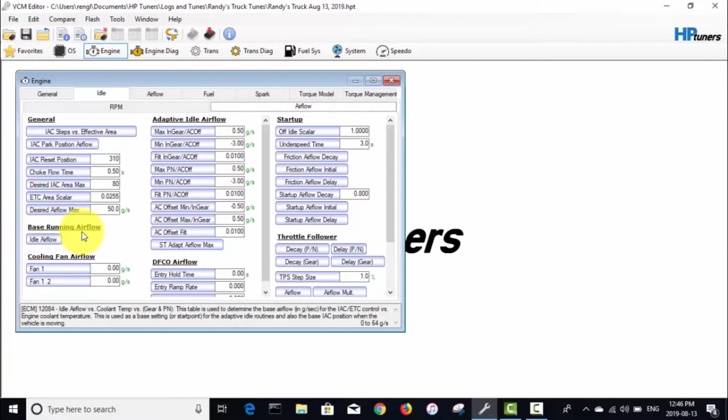Okay, so like I said, I'm in HP Tuners here. We'll go have a look at that idle airflow table. To get there, you go under engine, and under the idle tab, you've got to make sure you're on the airflow tab, and then it's right down here - this base running airflow, idle airflow. So we'll click on that, let me just drag this over here.

My theory is, even though if I look down over here, this desired airflow max in my stock tune was set at 40, and because these numbers in here are above 40, I bumped that up to 50. But I think there's something internal to the operating system, or something in the background somewhere that I don't know about, that doesn't like when these values are higher than 40.

So I think because my engine coolant temperature was starting out somewhere in this range, until that engine coolant value got high enough that this base running airflow was below 40, it would cause all kinds of problems. So basically I'm going to go into this table, select these 3 cells...

And I'm just going to set them to, I don't know, let's try 39.9. Now I'm not in my truck right now, but I'll hook up to the truck. First let me save this.

Okay, so we're in the truck. I've got that change flashed to the truck. I'm ready to start scanning here, and then we'll start it up and shift it into gear and see if it dies. Starting the scan, starting the truck. Starts fine, so we'll put it into gear, and it still dies.

So much for that theory. I think now what I'll do is plug in the numbers that Kyle from Goat Rope Garage sent me, and maybe that base running airflow table was still too close to 40, so I'll try lowering those numbers even more, using the numbers Kyle suggested.

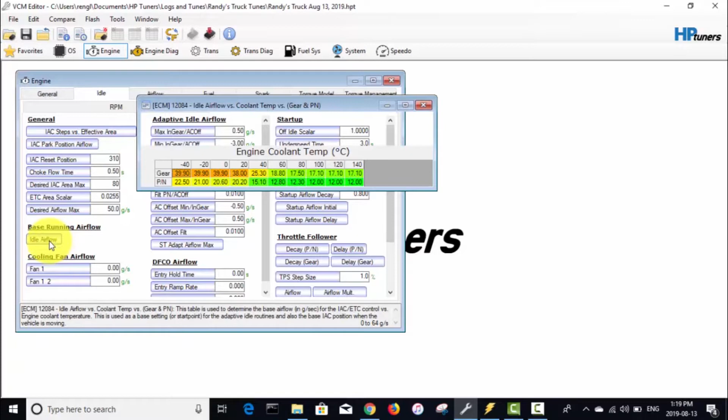Okay, so we're going back into the tune here to that idle airflow table, and I'm going to plug in the numbers that Kyle with Goat Rope Garage emailed to me. So he's saying in this cell go...

29.24, here we'll go 27.3, this one will be 26.77, 26.26, and 19.62, and then the rest of these will stay the same. So I'll save that and we'll flash it to the truck and try it again.

Okay, so we're back in the truck again. I'm going to start scanning. I've flashed that tune to the truck with the numbers that Kyle sent me, so I'll try it again here. And I'll try to shift it into gear.

And it works. Shift it back to neutral. Shift it into gear. It kind of bobbed down a little there, but at least it's staying running. So yeah, that seemed to work.

So thanks, Kyle with Goat Rope Garage. That's well worth the $15 to support his Patreon and get his input on this. It seems to have solved my issue, but...

I'm just looking back at my log here. I think I'm still going to adjust things, because if you look right here, my idle air counts are basically pinned at 310, which is the maximum. That's why the computer is calling for it to run at 925, but it's only able to run at 818 because the IAC stepper motor is maxed out.

Okay, so I took the truck for a drive, got it up to normal operating temperature here, 90, 91 degrees Celsius, and our IAC counts are in that 150, 155 range. Ideally we'd like that down around the 60-ish mark.

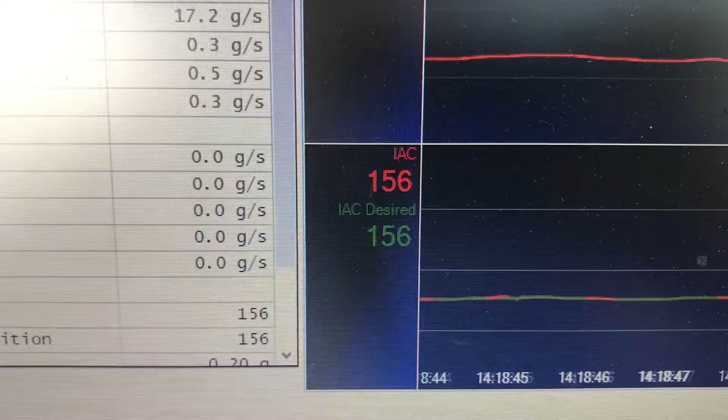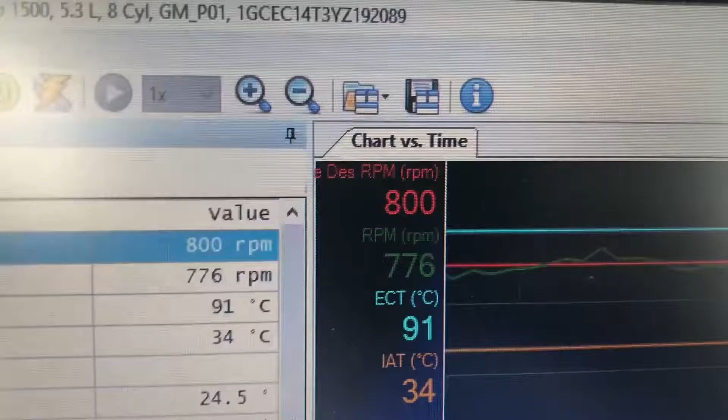But the first thing I'm going to do, right now it's calling for it to idle at 800 RPM. If I lower that, in theory, the IAC stepper motor should be calling for fewer steps. So that's the first thing I'm going to do before I calibrate the IAC steps, is try to lower my idle RPM and see how much that lowers my IAC steps. We'll do that now.

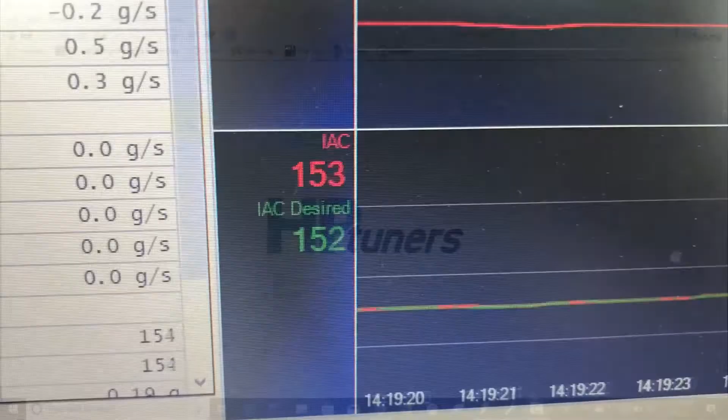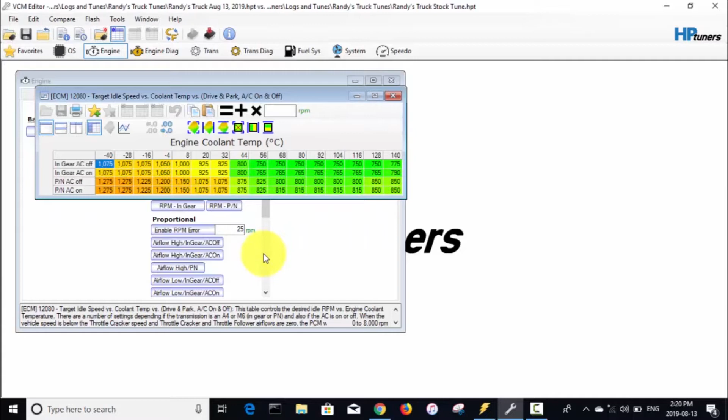Okay, so like I said, I'm going into the tune, and I think after I put the cam in, I bumped up the desired idle RPM by quite a bit. So I'm going back to this table right here. Now let me open up my stock tune, and we'll just compare. So this is my current tune, this is my stock tune.

So it looks like, actually I think we can see the difference here. So basically I raised that whole table by 225 RPM.

I'm going to go back and take, so right now at its slowest idle, it's idling at 750. Just for the heck of it, I'm going to take 150 off this whole table and see if it'll idle at like 600 RPM at the slowest. So we'll go to this whole table, go minus 150, and then hit this plus sign. So yeah, that's dropped everything.

So yeah, now at the temperature we're at, it should be calling for 600 RPM in gear, and I don't have AC anymore so that's not a factor, and it should be calling for 650 in park. So I'll save this and flash it to the truck, and then we'll see how that has affected our IAC.

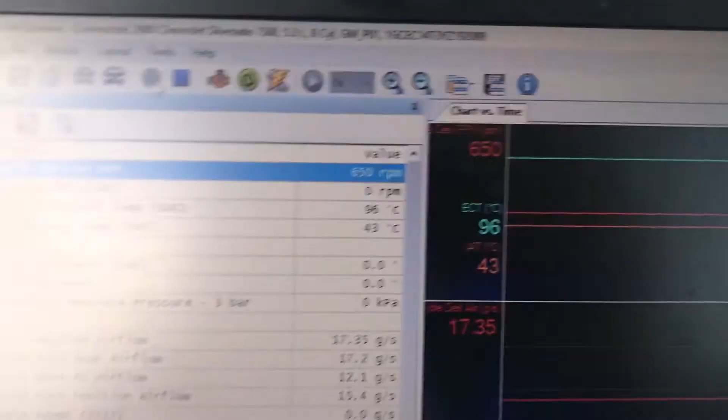Alright, so I got that new tune flashed to the truck where I've dropped the RPM from 750 to 600 at its slowest speed, and I'm scanning, so we'll fire up the truck and see how it idles and what our IAC steps are at. So you can see it's calling for 650 there.

Our IAC steps are lower. They're in that 140, 135-ish range.

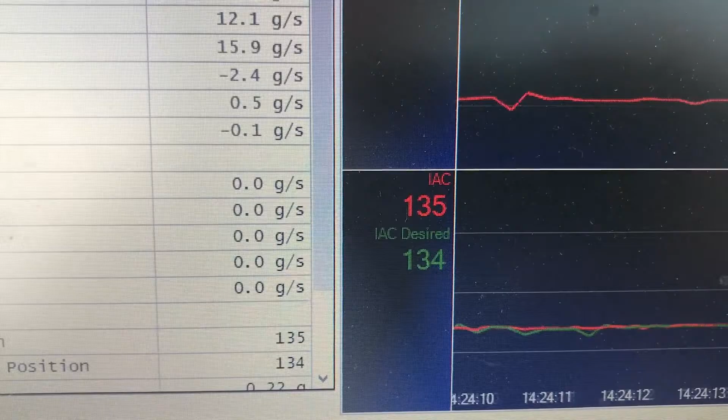But now let's shift it into gear and see how that goes. So it's calling for 600.

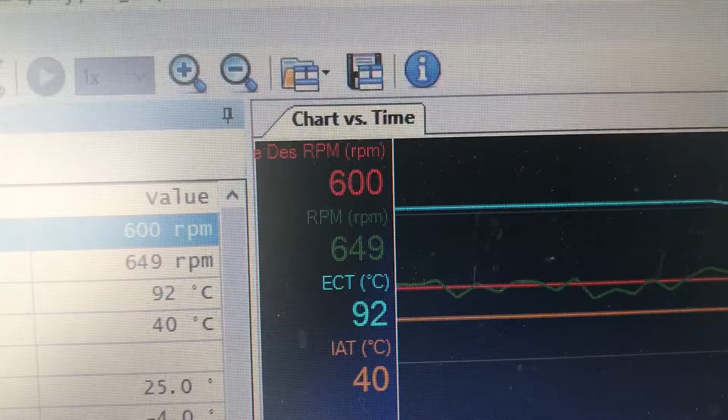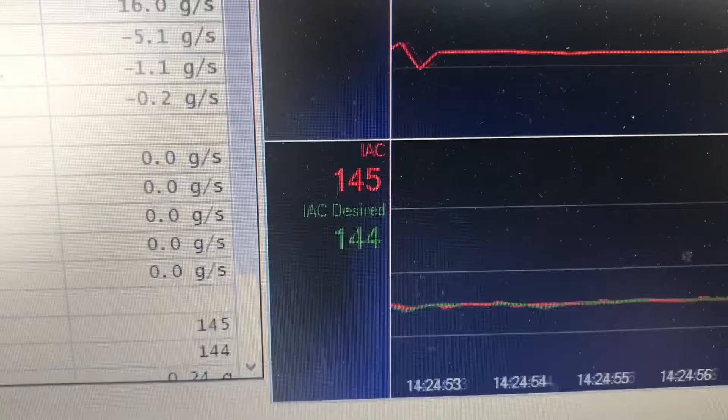IAC steps are still in that range, and that sounds too slow, like it's barely running at that. So I think I'm gonna add some of that idle back in, but it didn't make enough of a change on those IAC steps, so I'll shift her back to park here.

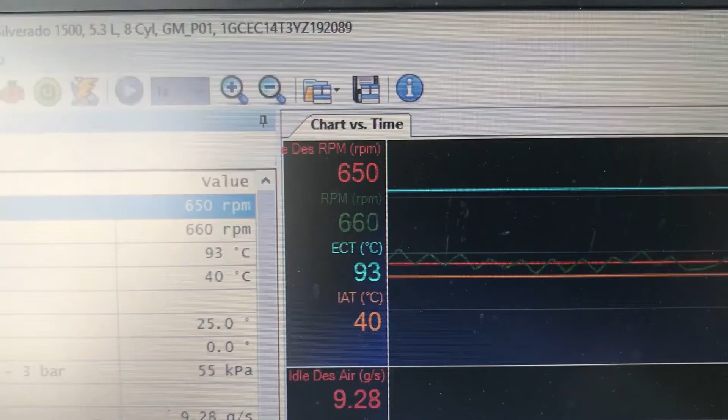I don't know, I'm thinking I'll add about 50 RPM to that table. Add 50 RPM back in and see what happens there.

Okay, so I added 50 RPM back in. So now it's calling for 700 in park, and it should be calling for 650. So I'll fire that up and see what happens.

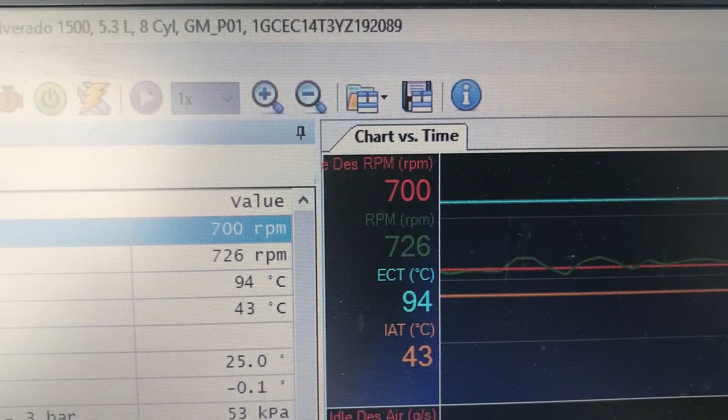Yeah, IAC steps are still in that 150 range. Idle doesn't sound too bad. I'll just try it in gear here.

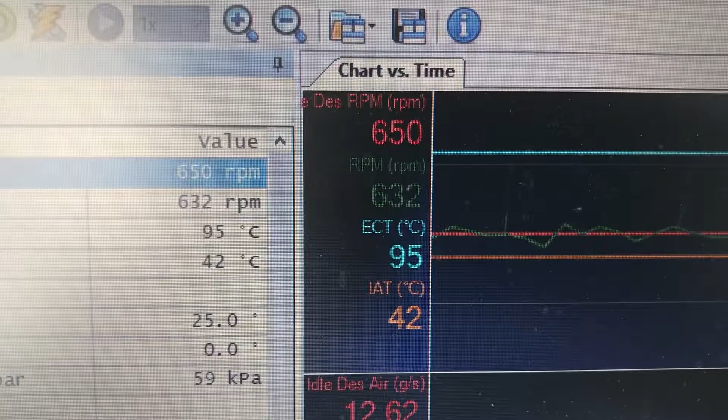So you can see the desired RPM dropped to 650. You can see a jump up there where it called for more air on the IAC. And it's not sounding too bad. You can definitely tell it's got a cam.

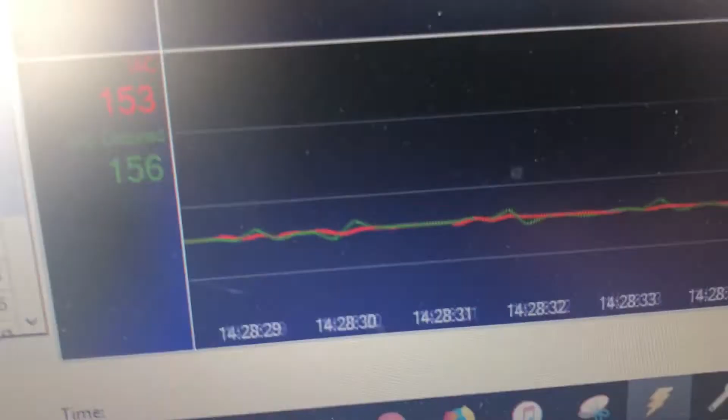But anyways, I'm gonna just park on the side of the road here. So I'm gonna go back to the garage and then we'll work through this IAC adjustment procedure and try and get those down into the 60 range.

So I ended up coming back to the house and we had company over and stuff, so I ended up not doing that IAC adjustment yesterday, which was when the first half of this video was made. So now the truck's been sitting overnight again, and I got to thinking after I did that idle adjustment yesterday where I brought down the speed, I think I ended up bringing it down like 100 RPM.

That's going to change that amount of base running idle airflow that I need. So I think now that the truck is stone cold again, having sat overnight, I'm going to run through another one of those tests, basically where I set up my scanner and start the truck from stone cold, shift it into gear right away, and log that desired airflow right from stone cold.

It's probably 15 or 20 degrees Celsius out right now, up until it gets to 90 or 100 degrees Celsius for operating temperature. So once we have those numbers logged, that'll kind of tell us if we're where we need to be with those numbers in the running airflow table.

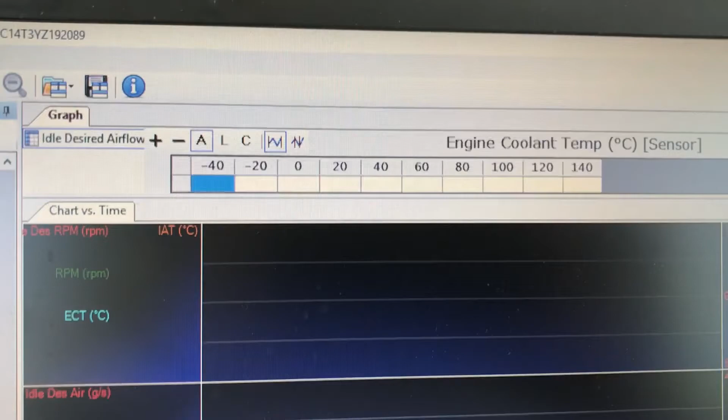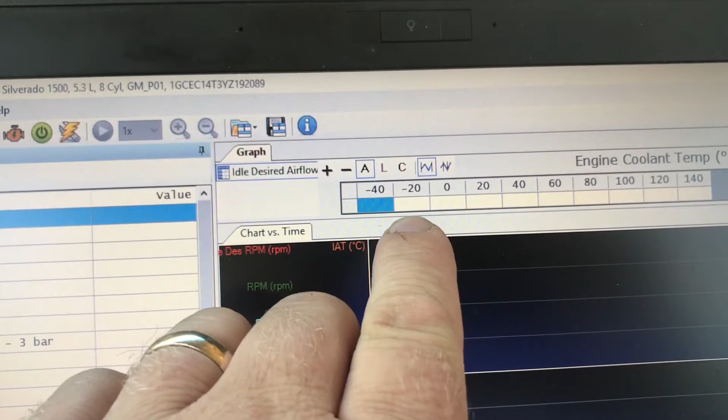But basically, like I said before, what I'm doing is starting the engine from cold, and we'll log this idle desired airflow. As it gets up to temperature, it'll start populating these cells here. So that's basically the engine telling us how much air it wants throughout this process.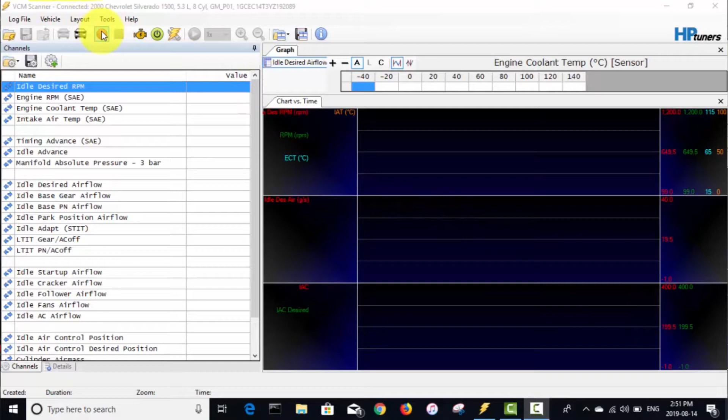So we'll fire up the truck now and shift it into gear. First I'll start logging here. Looks like it's logging, so we'll start the truck and shift it right into gear. And it stayed running again, so that's a good sign.

That means those numbers we got from Kyle with Goat Rope Garage are close. But see, it's definitely calling for more than 40 grams per second of airflow.

Okay, so I sped that part of the video up so I didn't bore you guys to death, but you can see I've been logging for 12 minutes now, and our engine coolant temperature is up to 90 or 91 degrees, and seems like that's about as hot as it's gonna get.

But yeah, you could see when I first started the truck, it was calling for like over 40 grams per second, so I think my original airflow numbers weren't too far off. But as the truck warmed up, it was calling for like 19.9, then 15, 14, and finally 13.9.

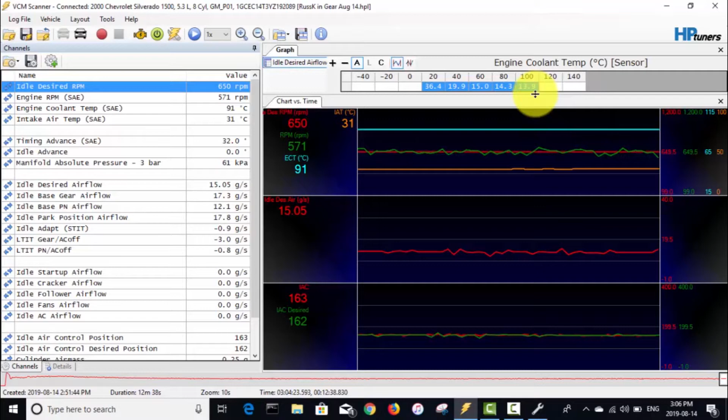Copy, and I'm going from the 20 degree cell to the 100 degree cell, so I'm going to go back into my current tune from the 20 degree cell to the 100 degree cell, make sure I'm in the in-gear row here, and paste.

Now I know that this computer, for whatever reason, doesn't like having numbers at 40 or even near 40, because I tried 39.9 earlier in the video and it didn't like that. So I'm just going to copy this 36.4 across to these three cells. Oh, it didn't take that for some reason. I'll just go... oh, I can do this interpolate deal like that, should make them all 36.4.

And then these two, so basically I'm copying this 36.4 to all the cells going this way, and then I'm going to copy this 13.9, I'll just type it in manually, 13.9 and 13.9. So all the cells going this way will be 13.9, all the cells going this way will be 36.4.

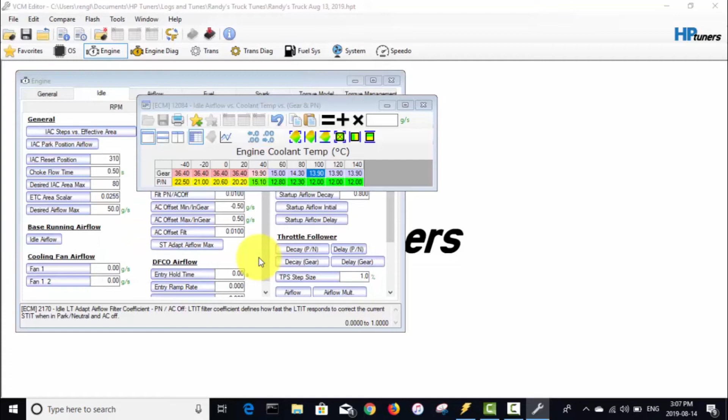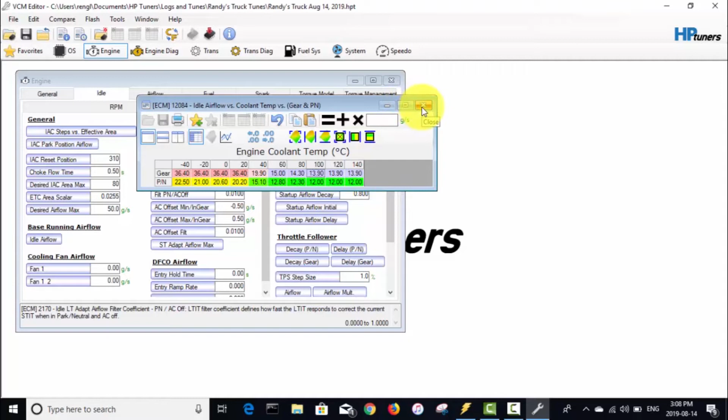Now I'll save this tune. I'll save it with today's date, it's the 14th today. And I'll write it to the truck, and then I'll have to do the same thing tomorrow, wait until the truck is stone cold again and do the same procedure in park and come up with new numbers for this row. But for now, since we've got the truck up to operating temperature, let's work on doing that IAC count adjustment.

Looking back at the graph, with it up to operating temperature, we're at 91 degrees Celsius engine coolant temperature, so that's probably around 195 Fahrenheit or so. Our IAC counts are still at 163, so like I said earlier, we'd like to get those down around the 60-ish mark. So now we'll open up the hood and see if we can find that set screw that adjusts our throttle blade's position. We'll do that now.

Okay, so now we're going to look at the procedure for doing this adjustment to our IAC count. This was a link that was also sent to me by Kyle at Goat Rope Garage, and it's on the HP Tuners forum, a thread called Adjusting IAC Count, and I'll put a link to it in the description of this video as well.

But if we scroll down here to post number 2, here's the procedure. In this post, they want our IAC counts to be 60 to 70, and I've seen this information elsewhere too, where it says like 40 to 60. So as long as I'm somewhere in that 60-ish range, I'll be happy.

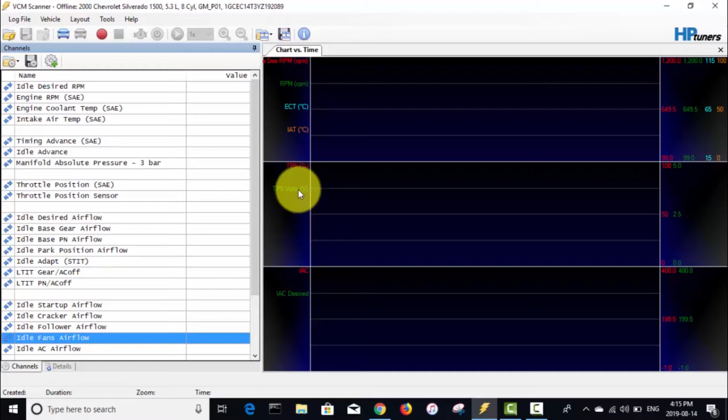So now we will go over to the truck and connect the laptop and have a look under the hood and find this set screw that adjusts our throttle blade. And then we'll go back to the instructions here.

Step number 2 is, with the key in the on position, we'll basically start logging in the scanner and turn up that set screw until our throttle position is at 2%. So we'll go over to the truck and do that now.

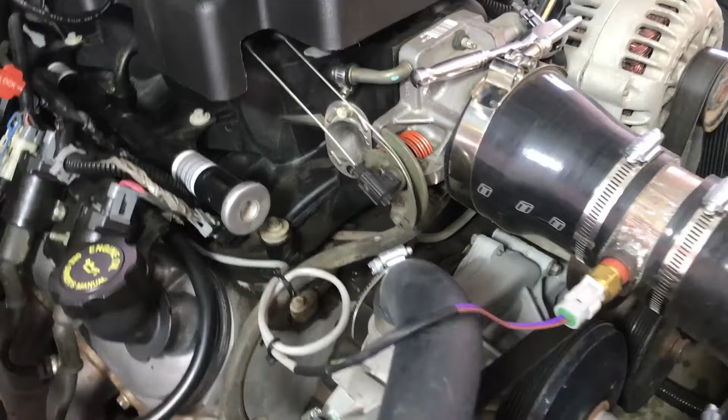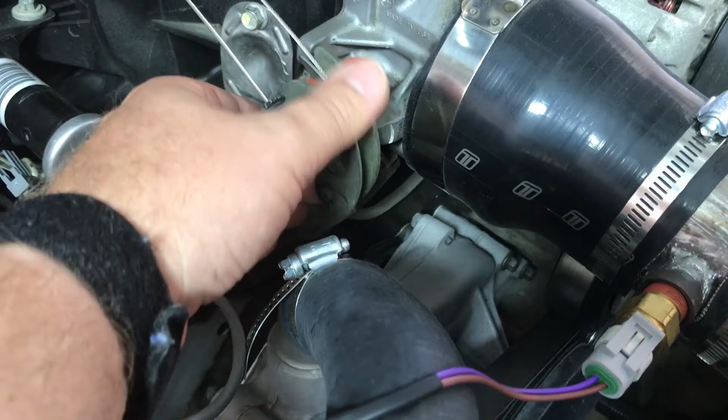Okay, so we're looking under the hood here, and obviously this only applies to the old school drive-by cable throttle bodies. If you're newer, like Gen 4 drive-by-wire, this procedure doesn't apply to you. But there's where the throttle cable and cruise control cable hook up on the throttle body, and this set screw is underneath this little tab right here, but the head of it is facing up, and it's a Torx T15.

Basically I think I might even thread this screw out and put it in from the top so I can get at the head better with this. But for now, let's start scanning here.

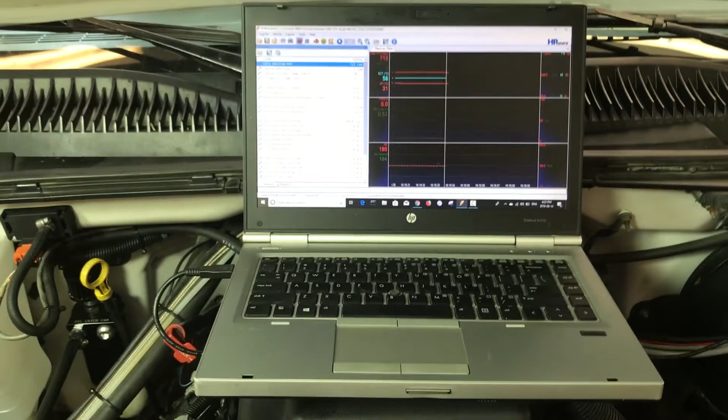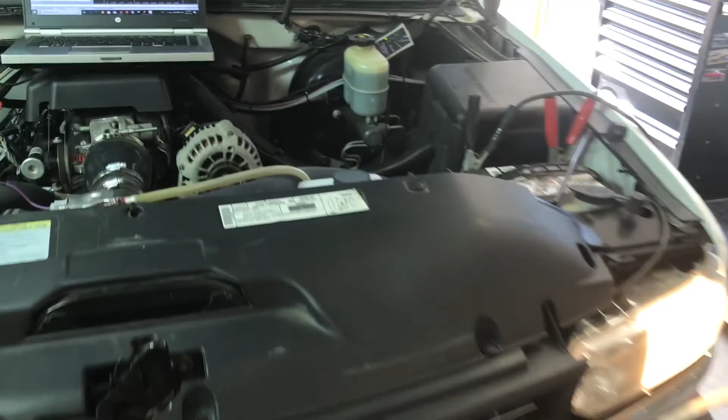One thing I should mention: anytime you're working on your vehicle in the garage with your laptop hooked up and the ignition on, you should always, especially in Canada where we have daytime running lights, be careful because when the key is on, the headlights are on. So to keep my battery voltage good, I've got my charger on there to keep the battery charged up, because especially if you're flashing a tune to the truck, you definitely don't want your battery to go dead halfway through. So anyways, let's start logging here.

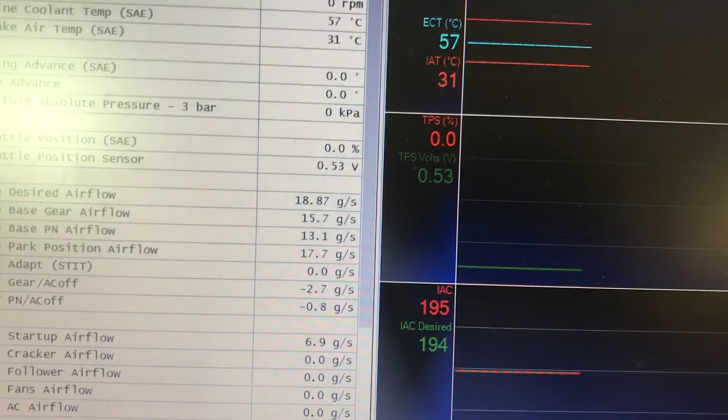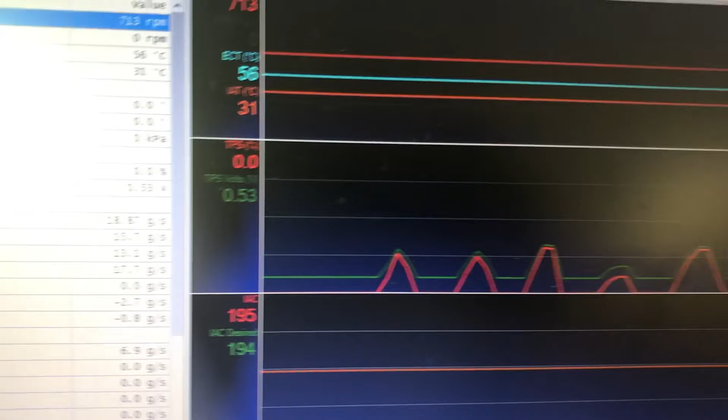I'll turn the throttle manually here, and we can see that TPS, both the voltage and the throttle position, are responding here.

Basically I'm going to try to do what the instructions say here. Let me flip tabs, but we just looked at it anyways. Basically I'm going to turn that set screw in until the TPS sensor reads 2%. I'll do that now. I'll get my little ratchet there, and I think I'll flip the screw around and adjust it so that in our scanner here I'm seeing 2%.

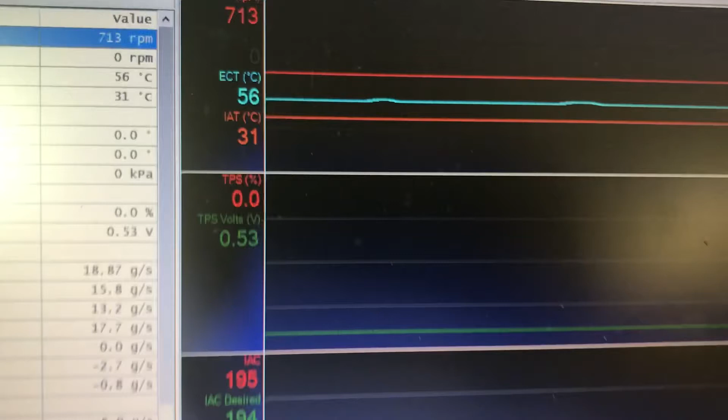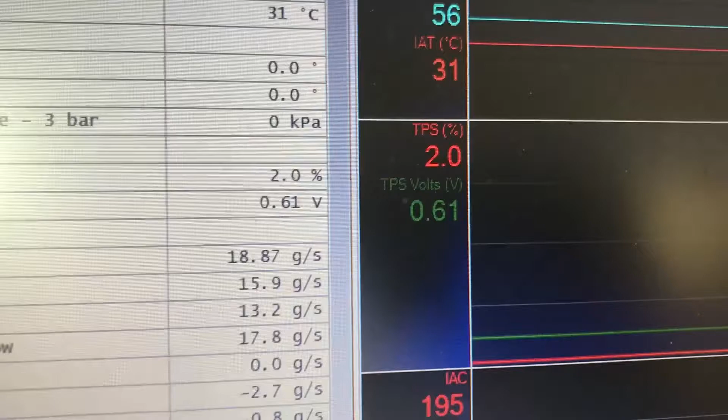So I actually didn't end up flipping that screw around because it wasn't too bad to get at it with my little ratchet there. I turned it up, and now you can see my TPS position is at 2%. The only thing that concerns me is that TPS volts is at 0.61. And if we flip back to the other screen here, it says your TPS voltage should be between 0.45 and 0.55 volts. I don't know if that's going to cause a problem, but we'll try to do steps 3, 4, and 5 to do the TPS relearn and come back and see. That should reset our TPS position to 0, and we'll see if it affects the volts as well.

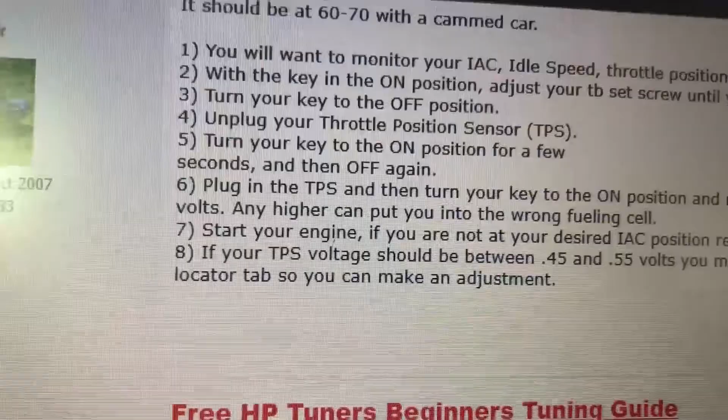So step number 3 says turn the key to the off position, which I already did. Now we'll unplug the TPS sensor, which I'm pretty sure is this plug-in right here. I've got that unplugged. Now it says turn the key on for a few seconds, then off again. So we'll go do that. I turn that key on again and off again, like step number 5. Now step number 6 says plug in the TPS, so we'll plug this connector back in.

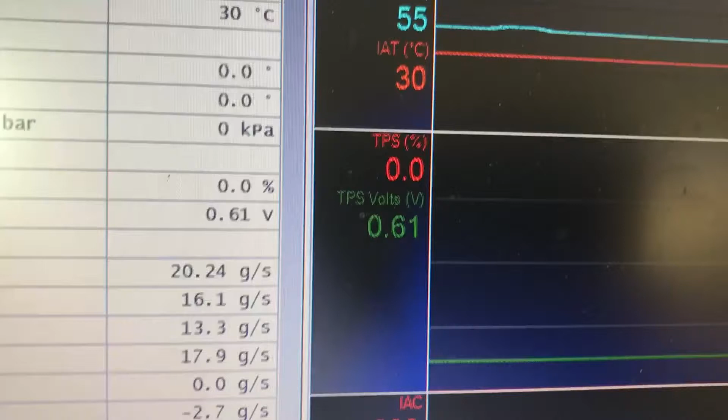So that's plugged back in, and now we turn our key on and restart logging. We'll turn the key on and hop over to the scanner again. Okay, so I got that sensor plugged back in and the key on, and we're scanning again, and it did reset the TPS position to 0, but those volts are still at 0.61, so I think that might be a problem.

One thing I know, some guys I've read on the forum slot out the holes in this thing—I don't know if you can see the little screw—so they can turn the TPS sensor to get it to read the correct voltage, like less than 0.55. The other option I can do is drill a hole, or I'm not sure if there's already an existing hole. I think there might be, and a guy could drill it slightly bigger, by like a 32nd of an inch or something.

So I'm not sure what direction to go here, but I think for now I might just fire up the truck and see what effect that has had on our IAC counts, and I'm hoping it has maybe brought them down. So I'll fire up the truck and see what happens.

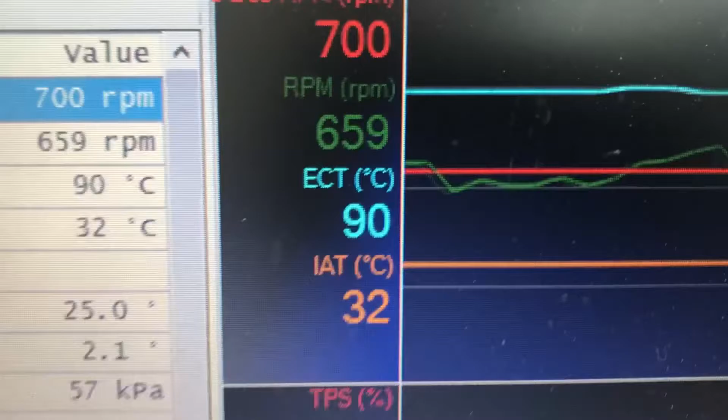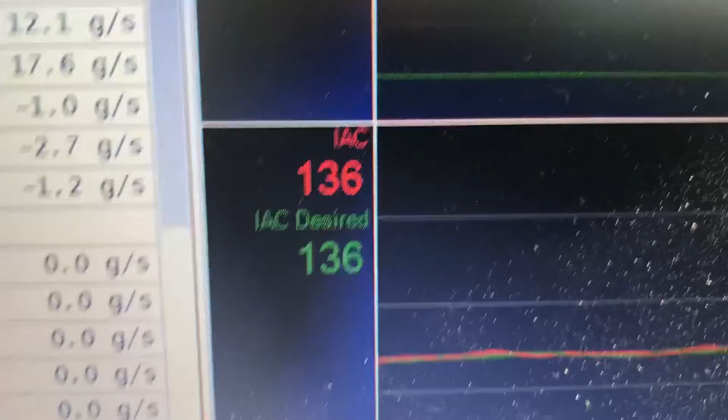Okay, so our engine coolant temperature is back up to 90, and our IAC counts have dropped some, like they're in the 138 to 142 range, but still nowhere down near that 60 area, and it almost sounds like it's running rougher. I'm wondering if this TPS voltage of 0.61 is causing a problem.

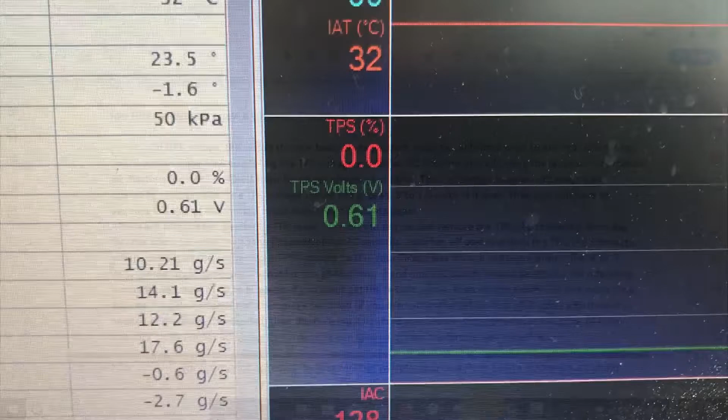So I ended up taking a little break at this point and doing a little more research, and another source I found was this course I bought from ERM Performance Tuning. The guy who put this together, Ed Moulton, has unfortunately passed on, but I think his son still sells this book or training course, so if I can find it, I'll put a link to his website, in case you're interested in seeing where I got this from. But basically, in this source, it says that TPS voltage shouldn't exceed 0.8 to 1.0 volts.

So I think I might try cranking that throttle blade set screw in a little bit more, and take it until the sensor voltage is just below 0.8, maybe 0.75 or something. Then we'll do that TPS relearn again, fire it up, log it again, and see what our IAC counts are then.

Okay, so I'm logging again, and I'm going to take my T15 Torx, can't do it with one hand, but basically I'm going to turn that set screw up until my TPS voltage is about 0.75, or somewhere just below 0.8, so I'll do that now.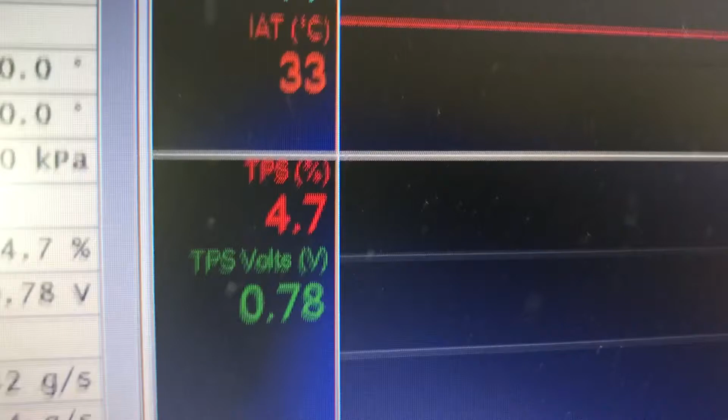So I got that set screw turned up there until my TPS volts are at like 0.78, so I actually made a pretty big jump. I'm at 4.7% on my TPS position, so I'll do that TPS relearn thing where I disconnect that sensor and turn the key on, just like we did before, and that should reset our TPS to 0. Then I want to make sure I can still get 100% on my throttle position after I've done that, and then we'll fire up the truck and see what that's done to our IAC counts.

Okay, so I got that TPS relearn done. I'm back in the cab of the truck now, so we'll start logging.

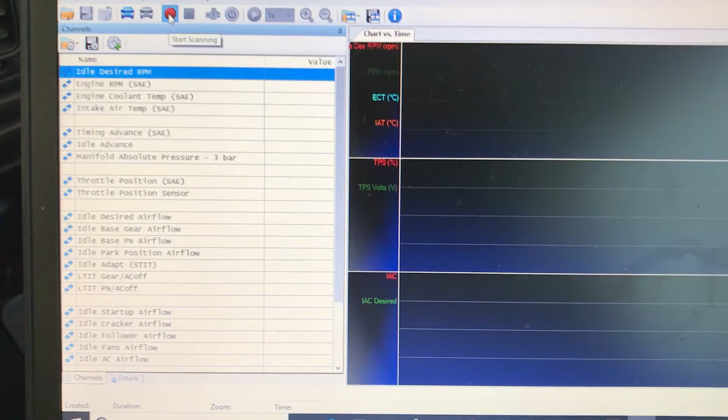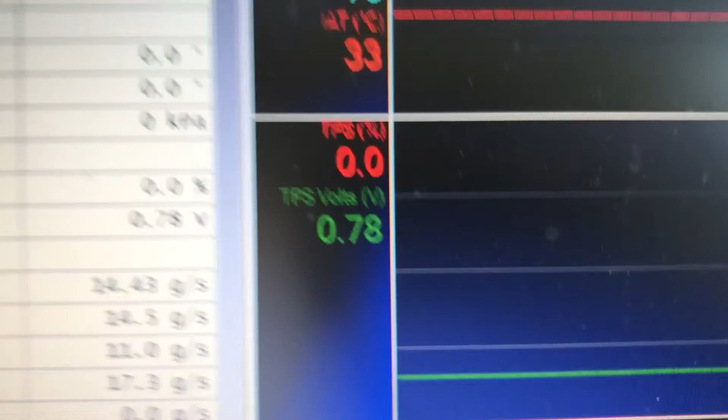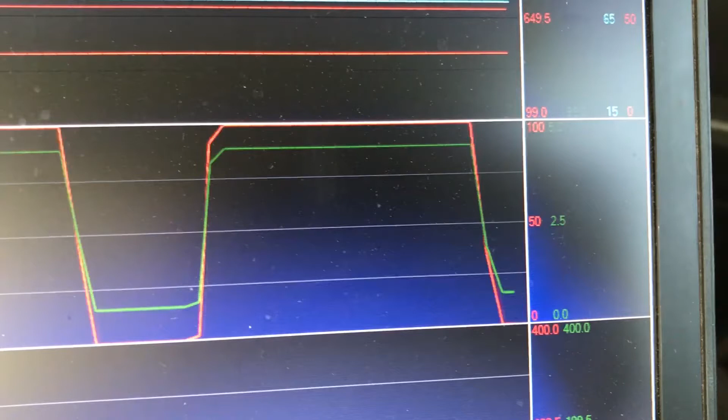So our TPS voltage is still at 0.78, TPS position is set to 0, and I just want to make sure when I hit the pedal that I'm still getting a full 100%. So I'll let go and step on the pedal a couple times. Yeah, I just wanted to make sure, after doing that like 5% adjustment, it's still seeing 100% when I've got the gas pedal mashed here, and it does.

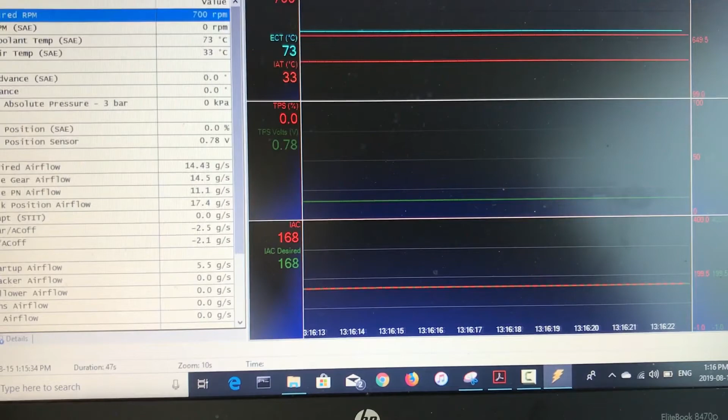So now we'll fire the truck up. I'll back it out of the garage here so I don't gas myself, and we'll see what that's done to our IAC counts. I'll wait till it gets up to that 90 degree mark because it's cooled down a bit for engine coolant temp. We're at 73 degrees now, so I'll back it out of the garage, let it get up to 90, and then we'll see what our IAC counts are at.

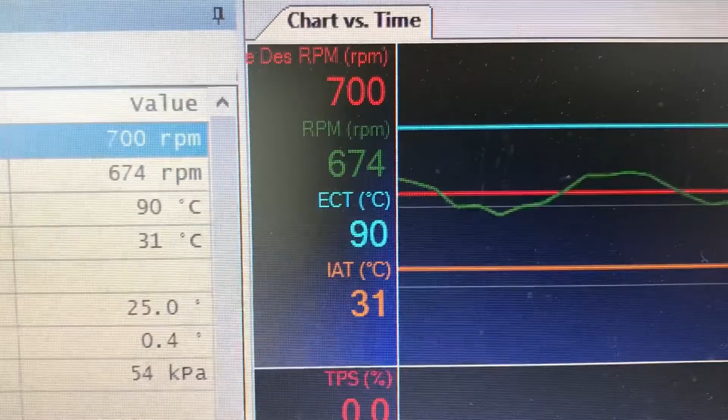Alright, so we got the truck back up to 90 degrees operating temperature, and our IAC counts are in that 50 to 60 range, so I think that actually worked, and it doesn't seem to be running too bad.

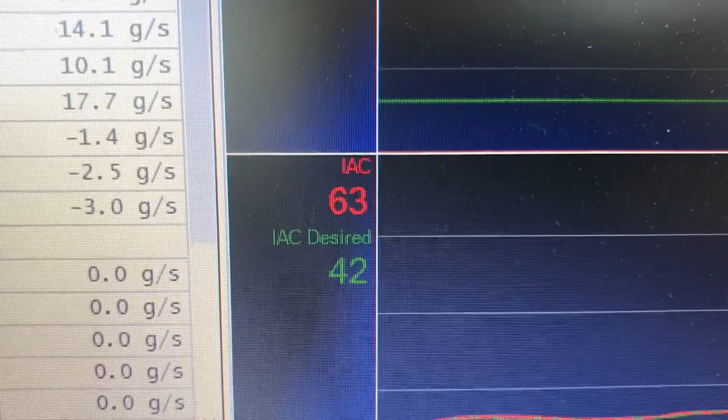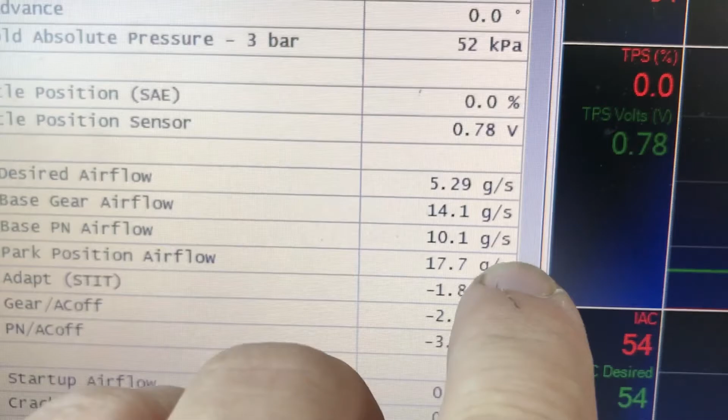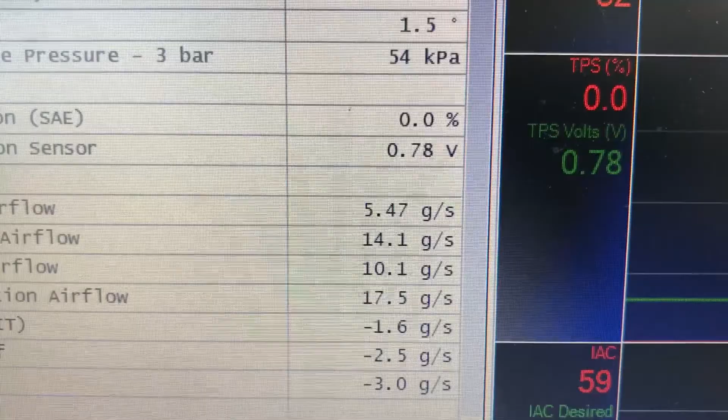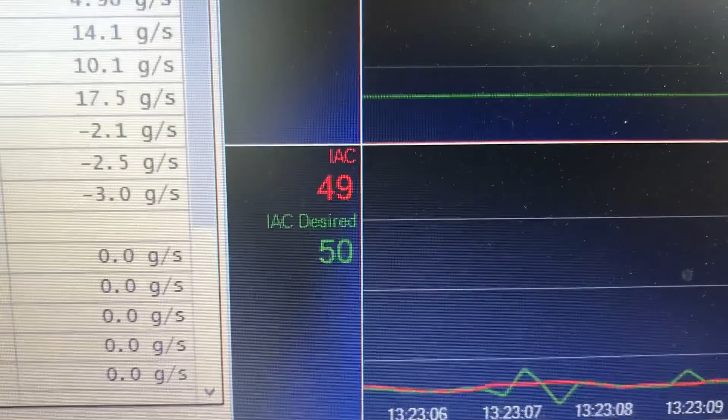But one thing I did notice is that it changed my idle desired airflow quite a bit, because in the table it's set around 10 for this temperature, and desired airflow is actually only around 5. So those short-term and long-term trims, if we add them together, are making about a 5 gram per second correction. So now I think I'm going to have to go back and redo that base running airflow, idle airflow table. But at least we got our counts in the range of where we want them now, so I think we'll call that IAC adjustment a success.

Okay guys, I think we're going to wrap this one up. We got those IAC counts down into that 50-ish range where we want them. Like I said, I'm going to have to go back and make some adjustments to my idle airflow table, both in park and in gear, but to do that I'm going to have to wait until the truck is stone cold again.